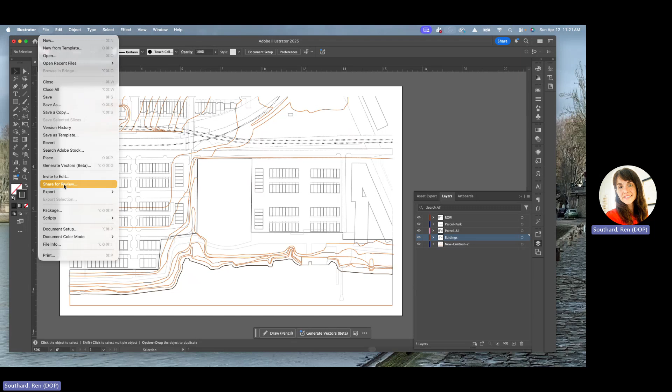And we are going to export at real scale here. So I'm going to go to File, Export As, and it goes to the folder. I've saved this to the project folder on my desktop. And I'm going to export it as DWG.

And this is my topo export. I'm just going to call it topo export new. We're going to scale up when we're doing the export.

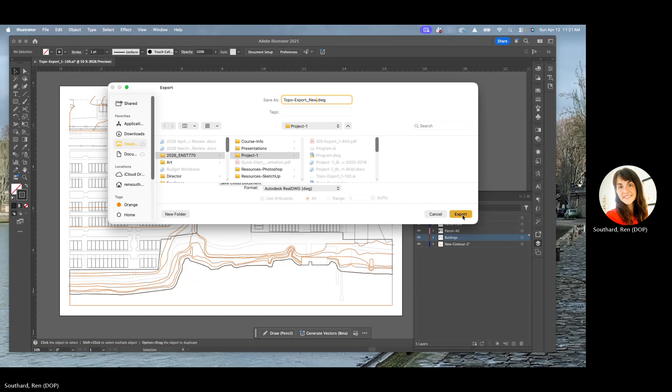And right now we're in a 1 inch equals 100 feet scale. We're going to bring this in at full size. So we're going to scale it in this little export window. And because we're going from 1 inch equals 100 feet, we have to convert from feet to inches, or pardon me, from inches to feet. So we're going to do 1 times 12, and that gives us 1 foot.

12 inches equals 1 foot, but we're going up to 100 feet, right? Because our scale is 1 inch equals 100 feet. So I have to times that 12 by 100. So the quick math on that is 1200. Make sure we get it right there. So I've just changed this to say 1 inch equals 1200 units.

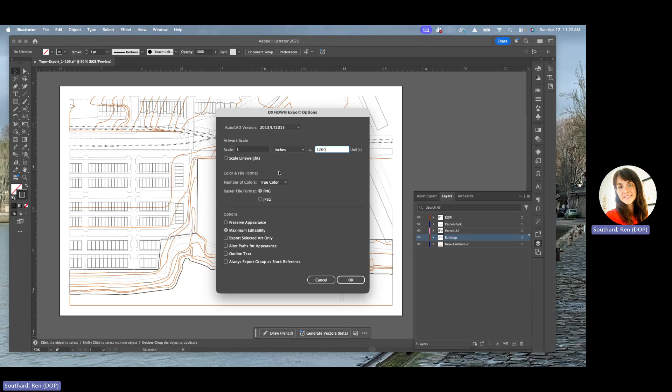I do not want to scale the line weights. I don't need any of these other things. And I'm going to hit OK. And that will give me the file that I need.

So I'm done with Illustrator for now. I'm just going to close that out. I'll save this, why not? And I have already opened a new SketchUp file for expediency. And I'm going to come over here to File, and I'm going to import.

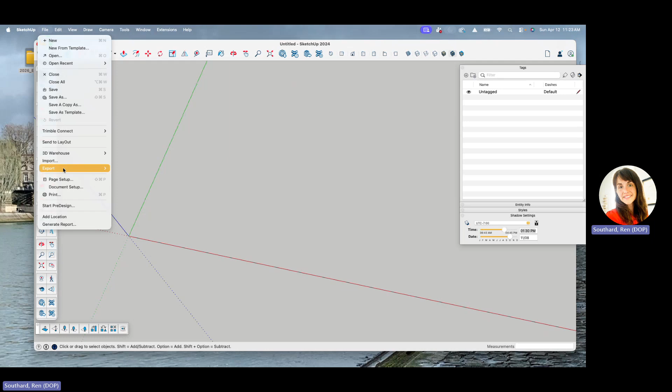And this is the Topo Export New, that's the one that I just named. It's going to come up with these import results. I'm going to hit close.

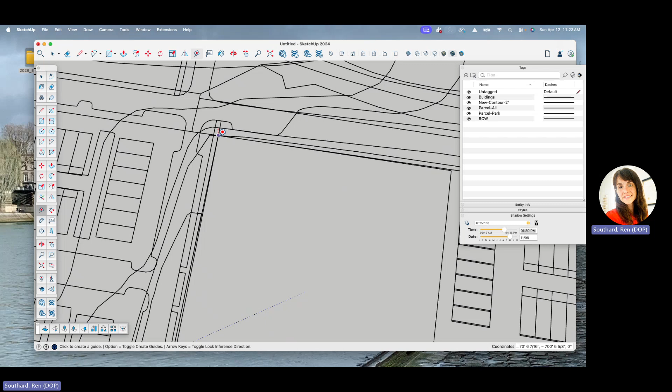First thing I'm going to do before I do anything else is I'm going to measure this to make sure that this is the size that I wanted it to be. And if you remember, our park parcel is about 269 feet across, and that looks right to me, or 270-ish feet. So we're right there. Great.

So when I'm orbiting around like this or scrolling in and out, this is just, I have a roll bar on my mouse. You press it in to orbit, and you roll it back and forth to zoom in and out. And then if I want to pan with a hand, I hit shift and my roll bar, and that'll give me my hand. Just a little refresher for you.

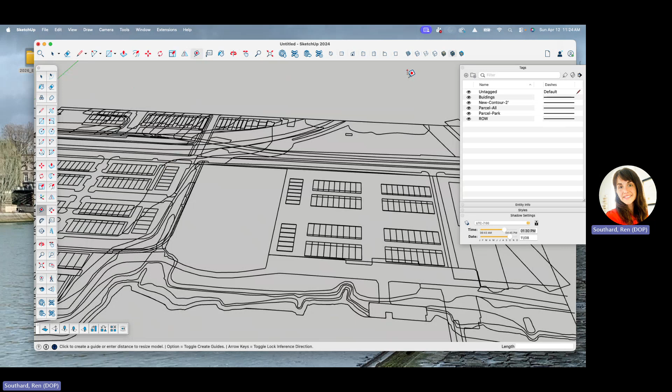And then spacebar always gives you your selection tool. So right now, this is all kind of smashed together. This is the reason that we do this.

All of the line work needs to be in layers. The first thing I'm going to do is I'm going to just explode this, and that will give me the ability to turn these groups on and off. You can see them, they're kind of lighting up as I'm clicking on them.

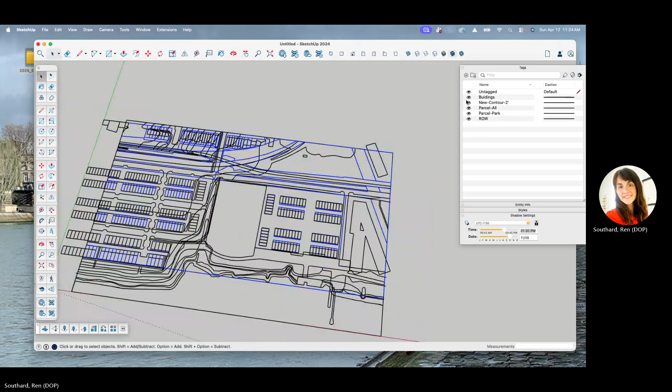And so that's perfect. So I'm going to turn off my building layer. You can see they just popped right off. I'm going to turn off my parcel layer. I'm going to turn off my park parcel, and I'm going to turn off my right of way.

And now I'm ready to work on my contours. So this is exciting. Before I do that, actually, I kind of want to make myself a border.

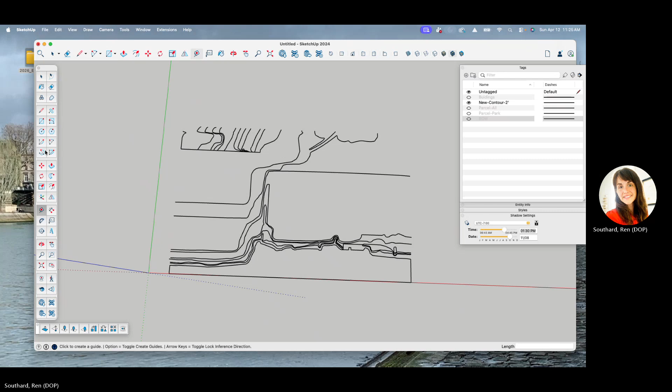And I know that I want, let's measure this. I kind of want to make this like 1,600 feet by 800. Let's make it like 15 by 800. So I'm just gonna kind of attach it here. And down here in your dimensions, I'm gonna put 50, actually, I'm gonna do 1,600 feet by 800 feet.

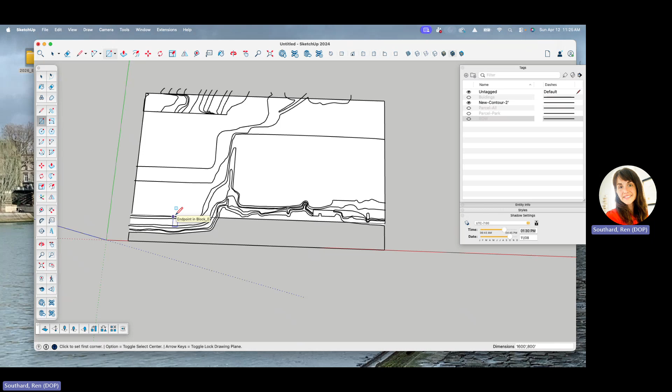That might not actually be big enough. And I'm getting some weirdness. So I see that when I did that, the park parcel popped up. So I need to make sure that everything is in groups before I start to make these into planes.

So here, I'm going to go to entity info. If you don't have all of these windows, I have mine preset so that when I open my SketchUp, I've got entity info, I've got styles, I've got tags and shadows. Those are just the ones that I use more than anything.

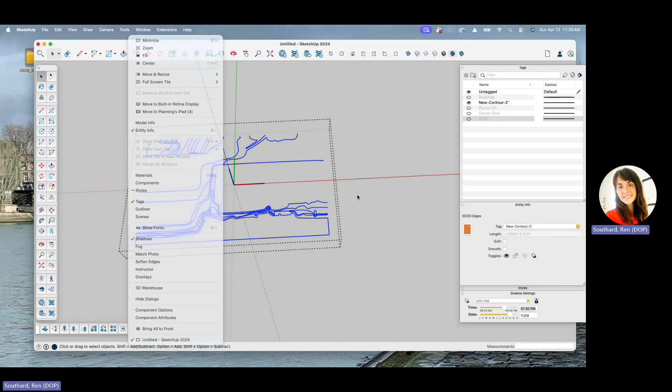So I want this in a group, and I actually want the group on the tag. So now this is on the new contours. And actually, I'm going to change this. I just need this to say contour 2 foot. So there's that. I'm going to turn that off.

I'm going to turn on the building layer. Oh, and actually, let's use this border here. So this is all on a group.

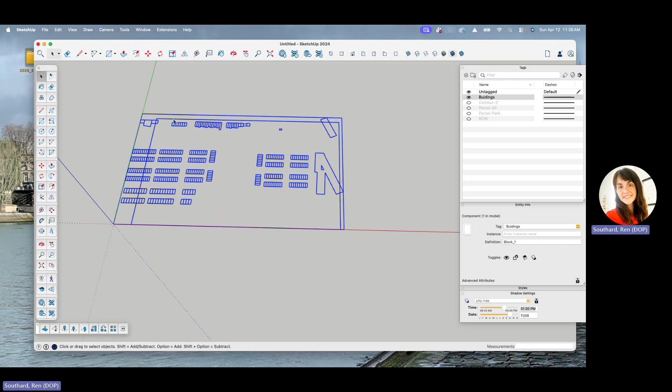Okay, I'm going to explode this. Explode. And I'm going to explode this one. Oops.

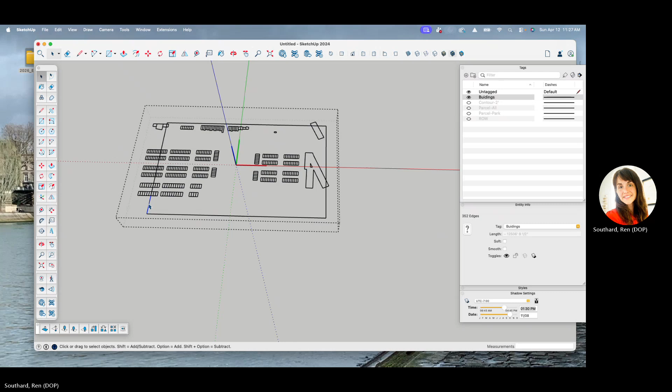All right, so I'm going to put all of this on untagged, but this is still on the buildings group, or the group is still on the building tag. This is the parcel. Again, I'm making this all onto the untagged.

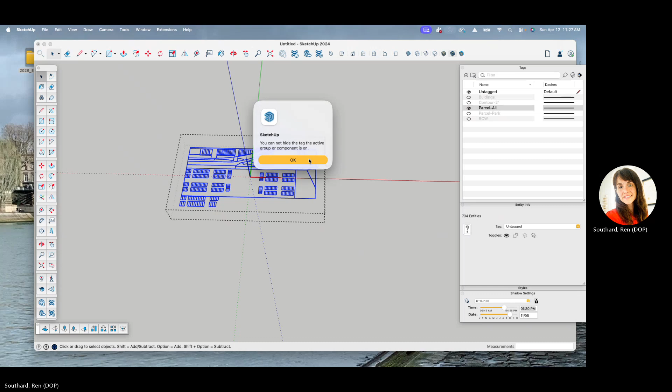And I'm going to do the park parcel. Okay, so the park parcel is actually not in a group yet, so that's why it popped up when I made that original rectangle, because this is line work and it's not in a group. You can see like some of it's blue, like I can select it. That means that it's not in a group yet. And it's going to give me a huge problem if I don't put this into a group first. So I'm going to put it into a group.

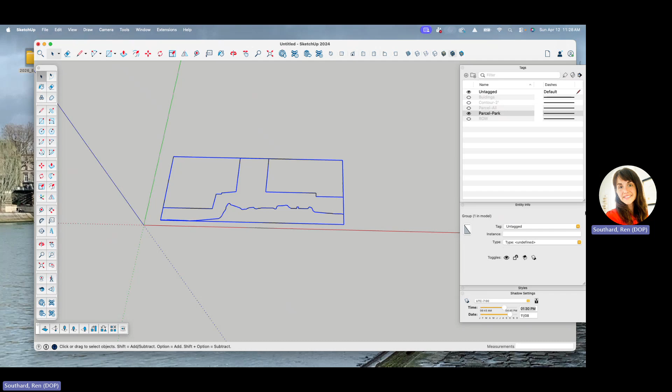I'm going to move the group onto the park parcel. And then I'm going to turn this line work, put it on the untagged. I'll make that untagged. And I'll do the right of way real quick too.

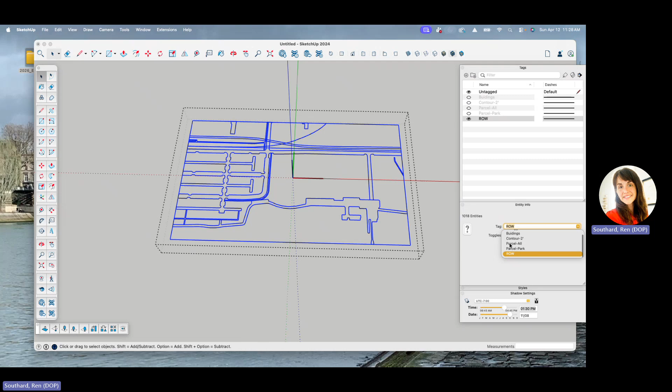And actually, you might have already included your right of way in your working model. So if you already have it, you might not need this, but if you have it in a group, it won't matter.

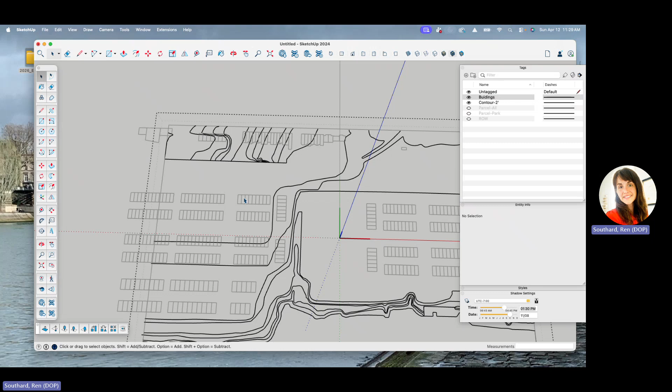All right, now we are ready to do some contouring. And as I said, I'm going to use this building outline, or the rectangle that's on the building outline. So I've left this on, but I've opened up the contour group. And I'm just going to draw from this corner.

Oops, I didn't quite get it there. And then draw into this corner. All right, so now I don't need the buildings anymore because I've got my own layer. And you see now we've got this contour line. You can start to see like, oh, it's all the way through.

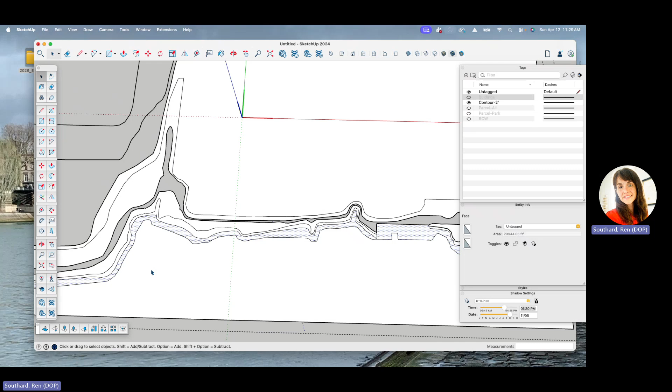I'm going to paint the water blue right away just because I like to, force of habit. I'm just going to use this. Super. Yeah, that's better. And I like my water to actually be... actually, that's not that bad.

I'm going to just use a solid color. So when I go in here, I'm in colors in model. Search the unused ones, and then I'm going to make this a little bit like...

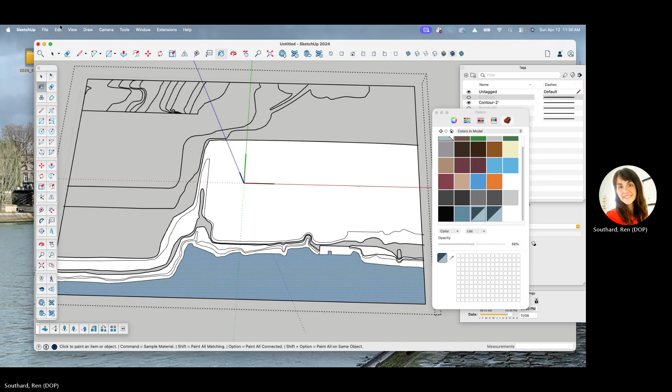Okay, perfect. So now I'm ready to start connecting the rest of these. The easiest way to do this is actually to use your line tool, so just hit L on my keyboard.

And then I'm going to draw a line kind of perpendicularly, or perpendicular from the water through all the way up. And yep, you'll see that that starts to get you all of this.

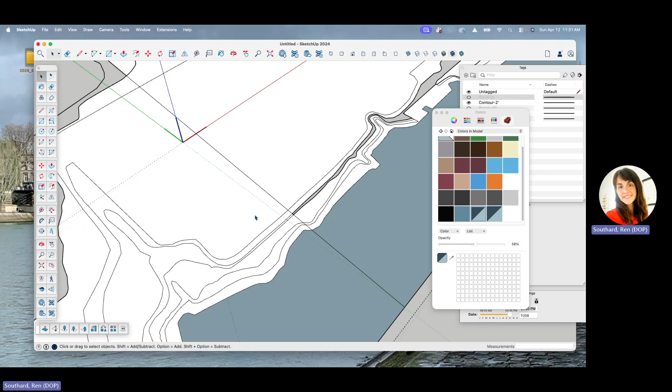And it looks like there might be an issue, and this is typical. Sometimes there's an issue, and I see that this might be it, this might be our problem. I'm going to use the line tool and just connect through. Yep, that was our issue.

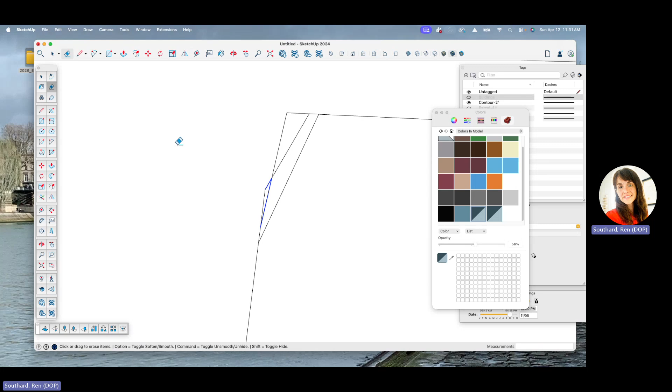Sometimes the geometry gets just a little bit messy, and I'm using the E, I'm just hitting E on my keyboard.

Sometimes if my computer's tired, it will give me a little bit of a hard time. And you can see this right here. Oops. There it is, I didn't mean to erase that.

So I want to connect this right here. I think because these lines were layered together, that's why you're getting this interesting grouping. I might actually delete these and just start with a new line here.

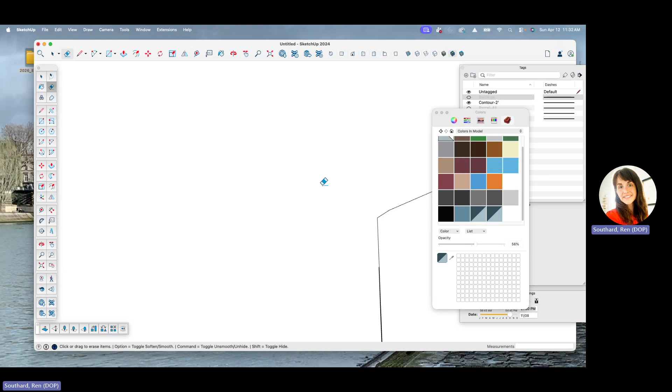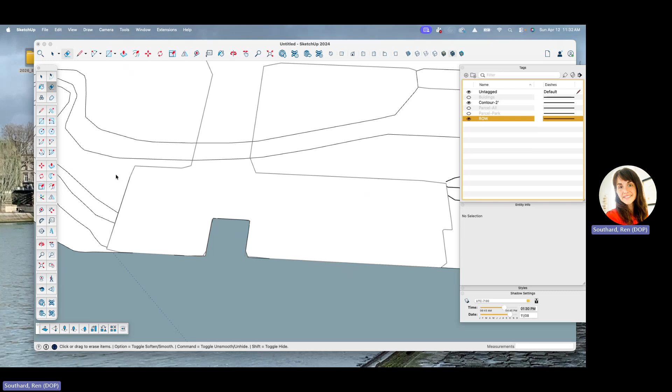That's better. I want this to be... I don't want duplicate lines. So what I'm going to do, and I'm going to turn on the right of way again, because that's what I'm trying to connect to.

Draw this one right here. I'm going to go to the corner and I'm going to go back here. So almost, we're almost there. I'm going to try that one more time. And it should... there you go.

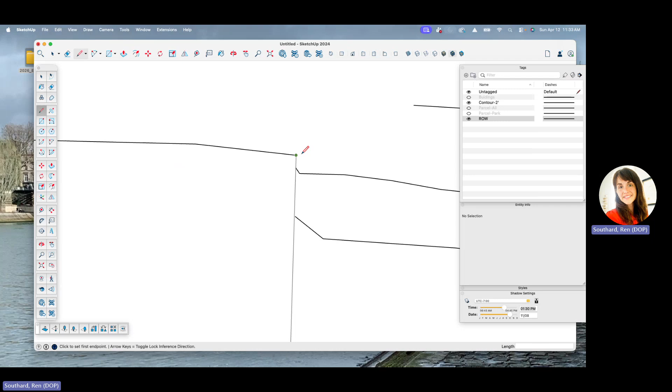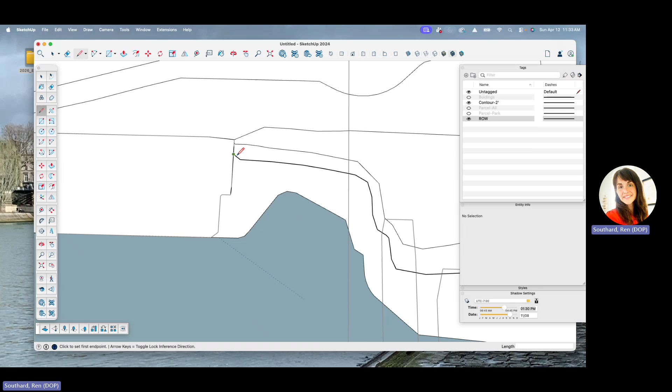You saw the line change should signal that you've picked up what you need there. So I'm just tracing. Oh, that's not what I wanted to do. So this actually, this one right here, we're going to go to the edge and then we're going to go up.

And now we've got contour lines that run around this.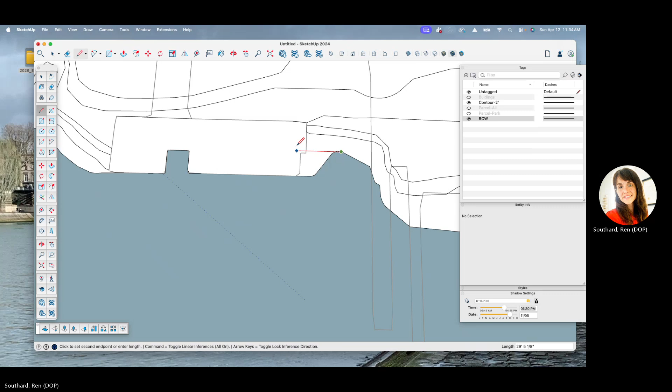That's pretty good, actually. Might actually make this water run underneath this a little bit more fluidly. So it's here and come down here. And then I can get rid of this line here, because this is the dock, so it makes sense for the water to run underneath this dock, this right of way that we're looking at.

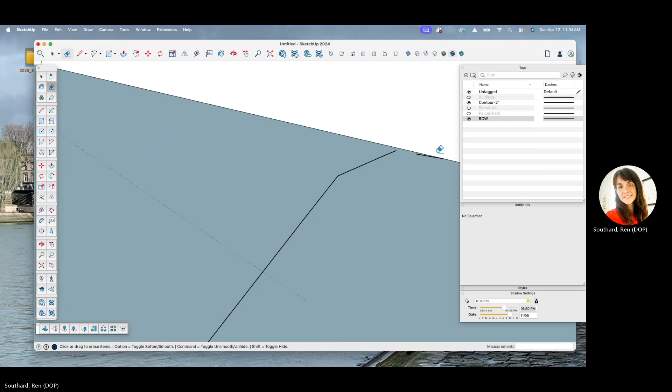And I'm going to triple click this one because I've disconnected it from the other portions, and I'm just going to delete that. And then I'm going to use the E tool and kind of smooth this out. Oops.

Well, we don't want that, but I'm going to use the bucket tool and I'm just going to make this the right color. So that's on ground. Okay.

That's one. Okay. And this is probably actually too sharp, so I'm gonna use my line tool and come over here. Then I can get rid of this weirdness. Okay, that makes sense. So now I have this.

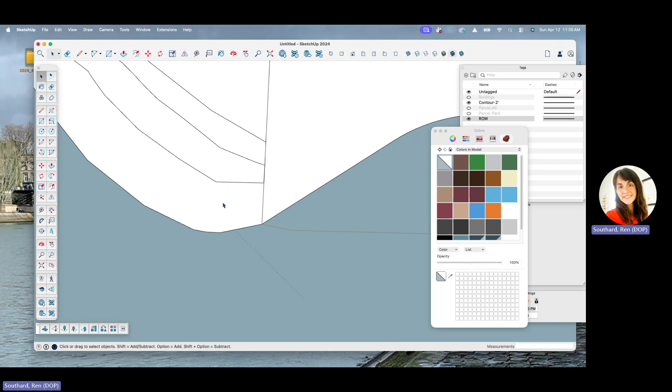I've got this guy and this guy are one contour set. And this guy, oops, this right here - this is a contour set, and this is a contour set.

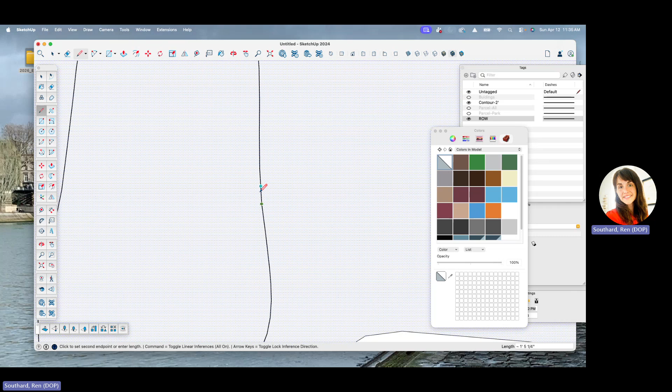Okay, and then this, you see this shape hasn't been closed yet. So I'm gonna use the L tool and I'm just gonna close that shape. And I don't need these lines, so I'm gonna use the eraser and just clean these up. You don't have to do this, it's just sort of best practices to get these little frayed ends cleaned up.

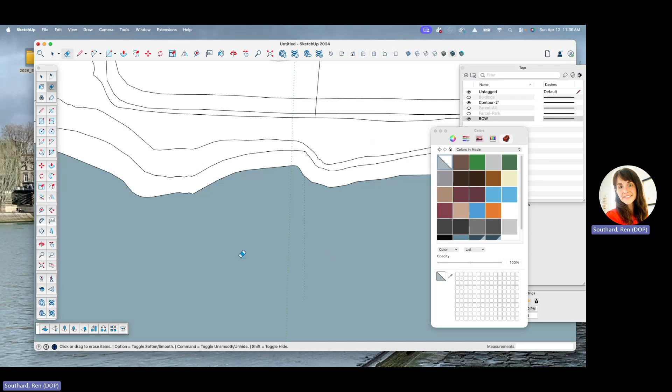The other thing is, so now I've drawn this line through, I don't need this line anymore that I used to close these, to convert the line work to a plane. So I don't need that where the plane is closed.

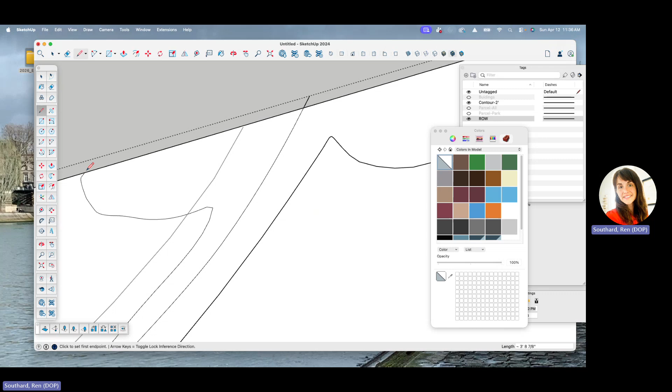But you see up here, there's some - this one doesn't quite connect, so I'm gonna have to draw this to the edge, to this edge. So now I've closed that one. And I'm gonna turn off the right of way again, because I don't think I need that anymore.

This one right here, this didn't connect, so I'm gonna hit L. There, it closed it.

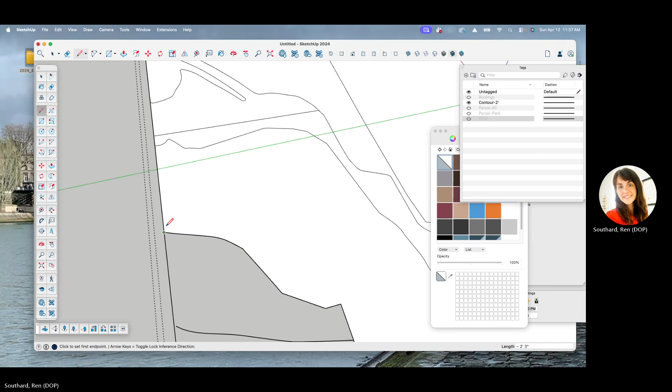And then for this one, I'm just gonna connect these two, because I can see that they're not connected. So this side, and then I can delete this - that's that leftover little portion that I drew through the site.

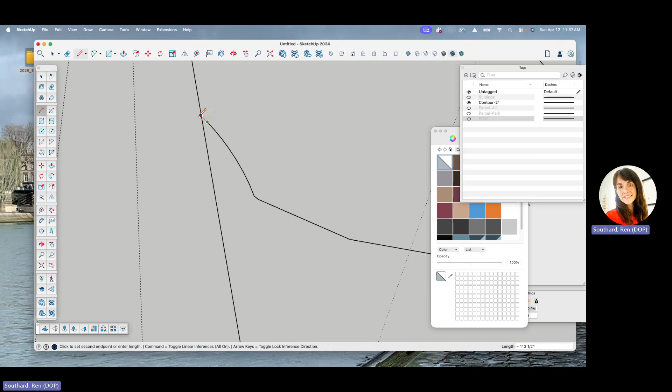And then these guys are close. So I think what I'm gonna do for this - oh, I'm actually really close. I'm just gonna connect the rest of this. And this should start to close the shapes just sort of naturally for me. If it doesn't, I might have to draw another line through here.

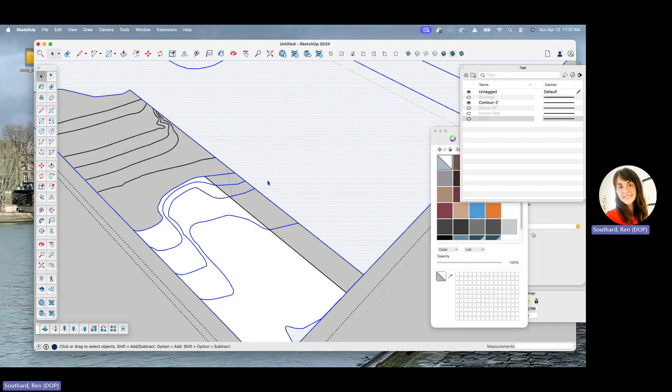I mean, it's starting to look good. I like to draw this through the - okay, so we've got some issues over here maybe. I like when you're doing this, it helps to draw through the sections. And what I'm doing is I'm actually narrowing down where the issue is.

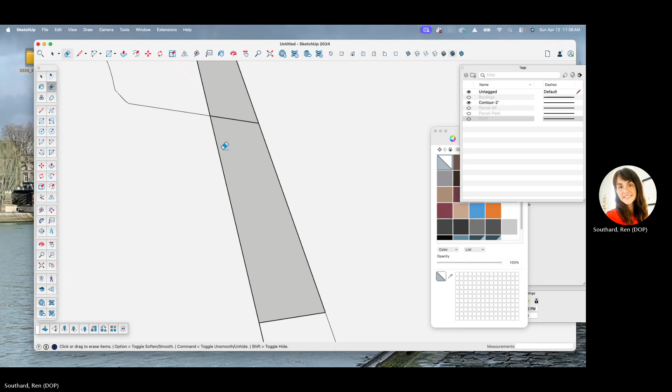And then as I'm doing this, so the issue is not there or there, and I can just erase as I go. But maybe there's an issue in here somewhere. So you'll start to see as I narrow this down. Looks like...

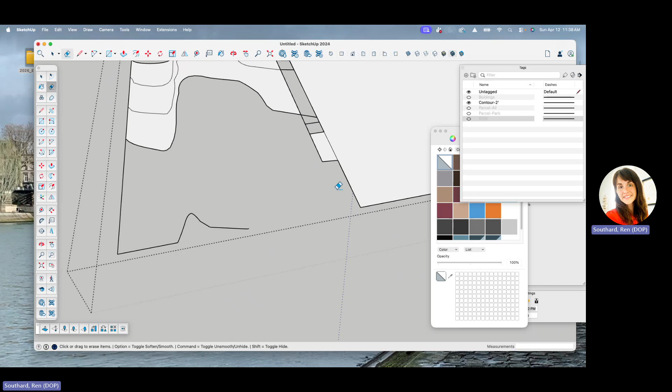Oh, there's an issue here. So you see this, I think - oops, I think that line is the culprit. Yep, I think that one was the one that was an issue. So I'm going to draw this line from here to here, and then I'll be able to close this geometry and make this into a plane.

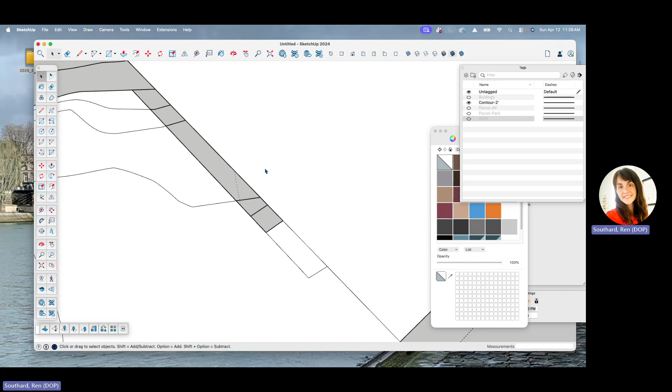Do this section - whoops, I didn't get that right, and I just hit undo. So as I'm doing this, try this. Okay, so that one's done. So now this contour is done, and I can do the next one.

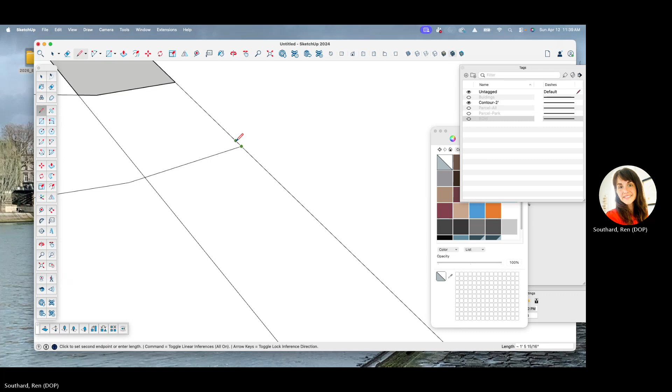And I think the issue is in here somewhere, so I'm just gonna undo those and redo them. So now those are finished. This one is the next one, I think. And sometimes it's a matter of drawing and redrawing.

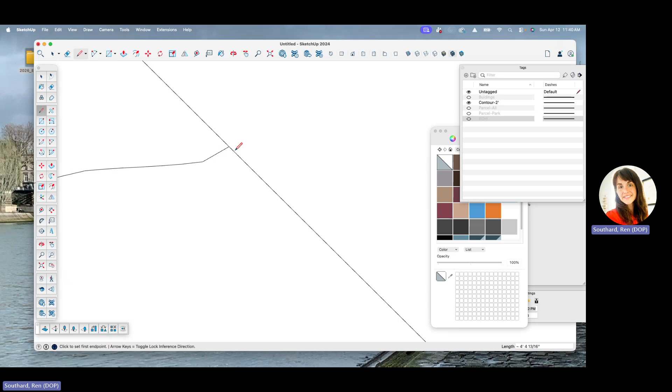Unfortunately, that's just how this works. It's imperfect, but once you get used to it, it's kind of zen. Sometimes it helps to take a little off the ends, like give it a little trim, and then connect it from there.

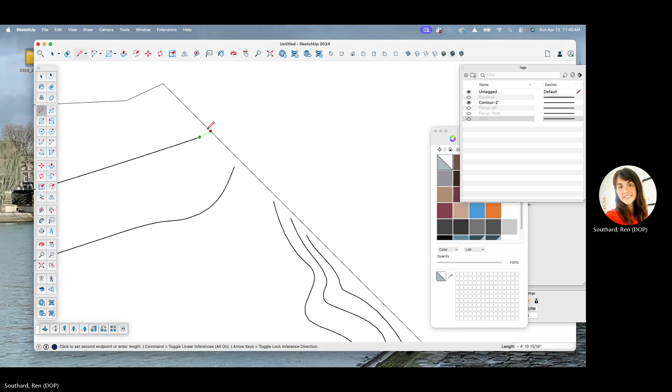Okay, I think we're almost ready. So these are all 2-foot contours, and now that I have this one, these are all planes and I'm ready to start moving things around. I'm gonna save this - I should have saved it initially. And then we will come back and start to push and pull.